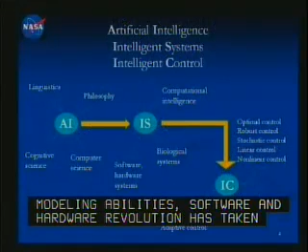Some of the ideas in intelligent systems that are new and not so much in traditional AI is looking at biological systems as inspiration, also modeling abilities. There's been a software and hardware revolution that's made implementing some of these very complex algorithms much easier. Intelligent control does have traditional control features such as robust control and optimal control, but also has brought in new ideas in predictive, adaptive, real-time optimal, and learning and planning down to an implementable level in hardware and in real systems.

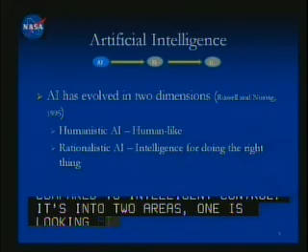AI, like I said, is quite old compared to intelligent control. It's evolved into two areas. One is humanistic AI, trying to model humans and understand how humans think and behave. But the one that is closer to an engineering application is rationalistic AI, which is using what we know about intelligence to do the right thing from a machine point of view.

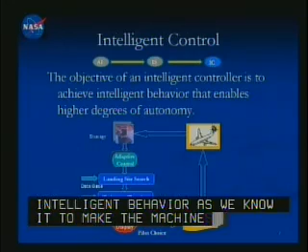So I have a little architecture here that I use to highlight what I mean by higher degrees of autonomy. This architecture is out of safety. It's a good way to illustrate higher degrees of autonomy.

We do have a pilot in the loop, and the airplane suffers some kind of damage or an upset condition. In a typical current generation airplane, the pilot will have to adapt to that condition, and sometimes the time frames can be quite small, down to almost a second type adaptation. So the pilot has to work harder, and in addition to that, he has to manage his resources. So there is quite a bit of workload on the pilot.

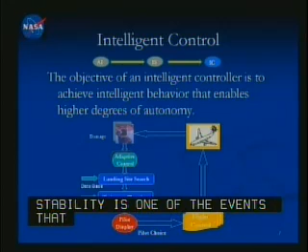Now, when intelligent control comes in, the first thing it can do is adapt to the damage and provide stability. Stability is one of the events that needs to happen down to sub-second levels, and that takes away some workload right away. So that's one degree higher autonomy. The pilot is not really directly controlling that aspect of it.

The next level of autonomy is once the airplane is stabilized, we still have to bring it down and land it safely. So there are many little pieces that need to happen. One of them is trajectory planning. Now that I have a reduced envelope after the damage, the aircraft needs to figure out what it has and come up with a plan that will safely land the aircraft. So here is another level of autonomy that's provided to the pilot, and the pilot can then opt to either use it or not use it. That's the idea of having that variable autonomy as an option to the pilot.

So intelligent control, once again, I think of it as: the objective is to achieve intelligent behavior that enables higher degrees of autonomy. This may be more relevant to aircraft as a definition, but that's the field that I work in, so it fits well.

There are other ways to quickly define intelligent control. I'll show you a couple of ways you could do it. These are the ways I've used to communicate it. If you look at controlling any system, we need two error signals. We need to get an error signal that shows you what is the difference between desired and the output of the system.

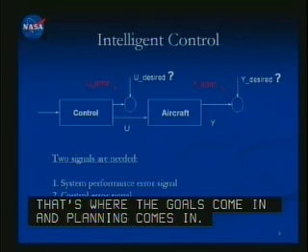So sometimes even the desired is not clear. That's where the goals come in, the planning comes in, and even intelligence can play a role. And once we know what we want to achieve, how do we get that in control? What is the error in the control activity? So that's another signal.

So intelligent control can be thought of as a way to generate these signals to achieve higher intelligence. Another way I've used to define intelligent control is using typical levels that you might have seen in many areas, where it's easier to show in a hierarchy of sophistication. So here at level 0, I think of it as robust control, which is kind of an instantaneous gain feedback controller.

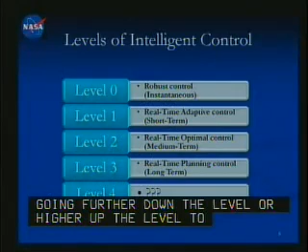At level 1, you are now adjusting the gains of the feedback to get better adaptation to the current situation. And from level 1 onwards, it's almost happening in real time, that is online, it's error correction, optimality, planning, and so on. You can keep going further down the level or higher up the level to achieve higher intelligence. We have used this hierarchy when we guide our research in intelligent flight control.

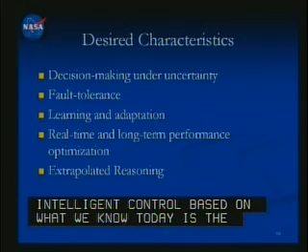Some of the desired characteristics of intelligent control based on what we know today are decision making under uncertainty, fault tolerance, learning and adaptation. The 4th bullet is a very interesting concept, playing a bigger and bigger role, which is where, towards the end of the presentation, I'll talk about brain-like intelligent control. That's where we want to go, which is real-time and long-term performance optimization.

Can I optimize as I'm flying? These are very applicable to even space travel, for example, where if you have onboard capability to sense the trajectory, then you can do long-term optimization. And finally, extrapolated reasoning.

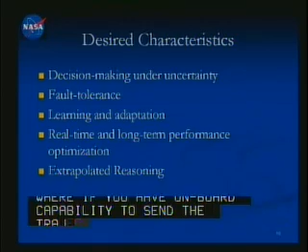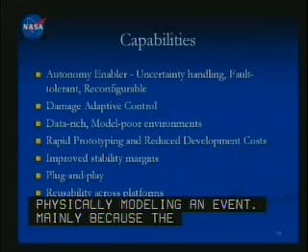So some of the capabilities we are after: autonomy enabler, I already mentioned that. Damage adaptive control. The 3rd bullet there, data rich, model poor. Clearly, you will see more and more that sensing is sometimes easier than physically modeling an event, mainly because the physics is either quite complex, or the computing power you need to model that physics may not be available for real-time applications, for example.

So sometimes it may be easy to sense and control based on what we sense, similar to what biological systems do. Intelligent control as a capability has got that aspect to it: rapid prototyping and reduced development cost. I can say from my experience, I can go from one aircraft to another, completely different classes of aircraft, and design an adaptive intelligent control in a matter of days. So that kind of quick prototyping is possible.

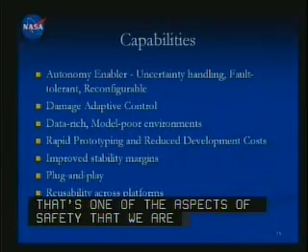Improved stability margins, that's one of the aspects of safety we are looking after, or going after. And I'll talk about plug and play and reusability. Okay, hopefully that gave a feel for what is intelligent control and what we are trying to achieve in terms of capabilities using intelligent control.

So the next few slides, I will talk about applications to aviation safety and next-gen designs. If you look at aviation safety, of course it has many requirements. Control is one piece of that solution. But in terms of control, what are we seeking? The capability we are looking for, if I have to say it in one word, is safe landing. Kind of bring it down and land it safely.

But to achieve that, we need to first understand stability, because that's the first thing that needs to happen. I should be able to recover from loss of control, in the sense understand how to maneuver the aircraft, and at the same time provide handling qualities that are consistent with what the pilot expects, so that there is no confusion while doing all of this to the pilot.

Motivation is simple. I have shown 3 pictures here, but you can get many pictures off the web of incidents and accidents that have led to the desire to help the pilot. Fortunately, in 2 of these, the pilots survived and brought down the aircraft quite well, because they had the time and the experience to do it. The third one, the tail damage one, did not survive.

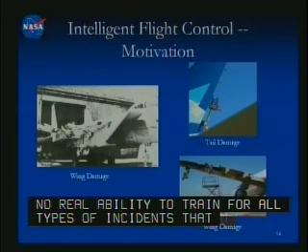The essence here is to understand that pilots who are trained can bring down most of these incidents, but there is no real ability to train for all types of incidents that might happen. The other aspect to safety is that many of these aircraft are built with redundant controllability, and we want to exploit that. So hopefully in the next few slides, I will highlight how we can exploit that.

Next slide, please. Okay, here is an example scenario. I know you cannot read that 1 through 6, but I will take you through. So there is an event, that's 1, that takes place. First thing you do is number 2, which is stabilize the vehicle. Number 3 is you perform a quick assessment of what is available. This is similar to what you may do if you get hurt, for example.

The first thing is you isolate. You don't want to use that arm because something went wrong. That's the first thing you do. That's similar to stabilizing. The second thing you do is assessment. What is wrong with it? And the third, number 4 in this, is to come up with what we call flyable trajectories.

Now this is where the concept of variable autonomy comes in, because we have a pilot in the loop. So we want to provide the pilot an option of choosing. Here I have given 2 choices, 5 and 6. Later on I'll show you actual experimental data where 5 assumes a restricted set of envelope and 6 assumes a little relaxed, a bit higher risk but more flyable trajectory. So the pilot can choose it.

Now where does intelligent control come into all of this? That's what the next few slides will talk about.

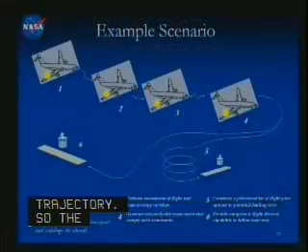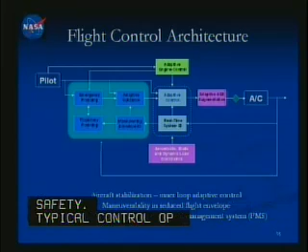Next slide, please. Here is an architecture we are going after in safety. We have several blocks in here. This is a typical control architecture. If you look in the middle, there is adaptive control, which is one of our big focuses. How do I provide extra stability? But there are also questions like, can I use the engine as an extra effector? How do I have to design or redesign the engines to provide an ability to control the moments from a stability and maneuverability point of view, beyond what is available right now?

And you see at the big block, which is all of the planning functions. I need to be able to do guidance, emergency planning, trajectory planning, and so on. The next few slides I'll concentrate on adaptive control, and also on emergency planning. So those will be my two topics. Under the Resilient Aircraft Control Project, we are looking at all aspects from this architecture.

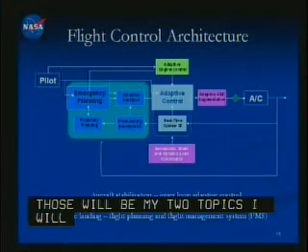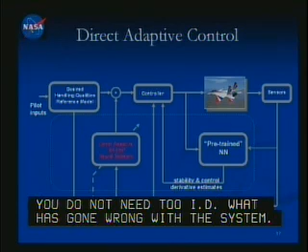The beauty of this direct adaptation is you don't need to do system identification. You don't have to spend any time identifying what has gone wrong with the system. And the benefit of that is it can accommodate many different types of incidents, not just wing damage or tail damage, but any combinations of that. So it has a pre-trained neural net, or if you want to think of it as just a function that captures known dynamics before the fault happens, before the damage happens.

So this is the current knowledge of what the system can do. And on the left, you see desired handling qualities. So the pilot, when he interfaces with the airplane through the stick, is actually asking for desired roll rate, pitch rate, yaw rate, and through an expectation model, what we call the handling qualities model, what kind of a short period or Dutch roll he expects. Typically there is a controller that takes that input, shapes it into control surface deflections that go to the airplane. And on the right, you see the sensing taking place.

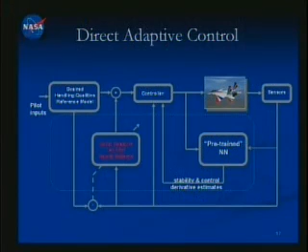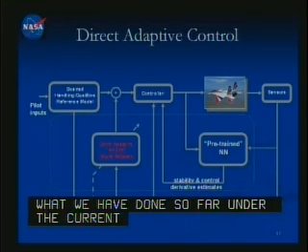Now at the bottom, we had those two components, the fixed neural net and an adapting neural net. Neural networks were used because they have their own nice features. I don't have time to go through that, but you can also use any parameterized function instead of neural networks. Now, what we have done so far under the current safety project and previous projects is we have researched this architecture quite a bit. Some of the results I'll show you today include flight test results that were done at NASA Dryden, and some of the simulation work that was done at NASA Ames and Langley.

Now, let's move on to the next slide, please.

If you look at the flight test results done so far, it uses an F-15 currently available at NASA Dryden. The nice thing about using an F-15 is you might think it's not very relevant to transport aircraft, but the beauty of it is you can take it to the edge, knowing it's got the performance to come back. So you can experiment with a high performance aircraft, all the features you're looking for, much more safely, since we have a pilot in the loop, than you could with an actual transport aircraft.

The modified F-15 available at Dryden has two canard surfaces, those two surfaces in the front. Those are scheduled as a function of angle of attack, so we can actually modify that scheduling to create instability in the system. So that's what we did. We took the multiplier that multiplies with angle of attack to the canard surface and messed with it, changed it to make it unstable.

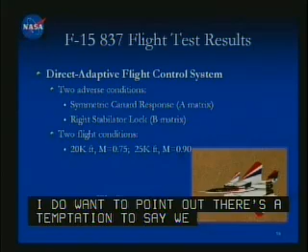I do want to point out there's a temptation to say we could do a lot of this experimentation with unmanned systems, and that's true, we can do a lot of it. But when there is a pilot in the loop, it completely changes everything, because now we are talking about two systems adapting, the pilot and the software. That interaction is poorly understood, and through experimentation we figured out that even we don't fully understand it. Pilot-induced oscillation is one of those events that's not desired, and that's the thing we want to avoid when we have both the computer and the pilot adapting.

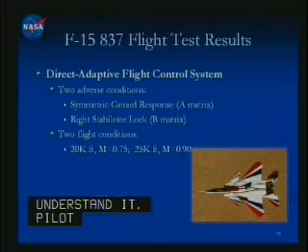So with that, let's move on to the video, please, and I'll keep quiet through the video.

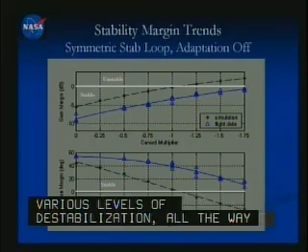The blue line is the flight data. So we flew several flights at various levels of destabilization, all the way up to neutral stability, which is shown on the right at minus 1.75 Canard multiplier. And the blue symbols on the line are the actual flight test data.

Then on the top there is a black dashed line. Those are the simulation data. Whenever we do our experiment, we first do it in our offices, then in a small engineering simulator, then in a full engineering simulator, and finally in the actual aircraft. So the black line is a full engineering simulation where there is a pilot in the loop, and you can see the simulation does not capture all of the non-linearities that you get out of a flight test. So right there is one selling point for flight testing ideas, because you don't really capture all of the non-linearities that you want to really simulate.

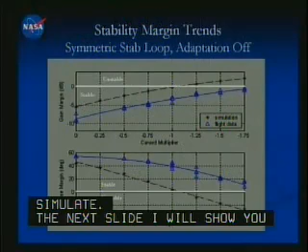Now, in the next slide, I will show you the concept I've been discussing about consistent handling qualities or consistent performance. You will see how, when we have neural net adaptation on—by the way, this is without neural net adaptation—so when I turn the neural net back on, both simulation and flight tests will look very similar. Can we go to the next slide, please?

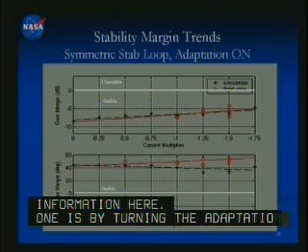So here there are two pieces of information. One is that by turning the adaptation on, simulation and flight tests behave the same. And the reason for that is the adaptation. It's adapting, making the simulator behave like the real airplane by adapting the handling qualities model, because the neural net is able to absorb all the non-linearities.

And the other thing I want to point out here is you can see the best place to see it is at the rightmost point. We have gotten back the 6 dB. Before, in the previous slide, we had 0 dB at the extreme right. Now I have 6 dB. So by turning the adaptation on, I got back the stability that I was hoping for. This is a big selling point for adaptation—you can gain back the stability that you lose by having a damaged situation.

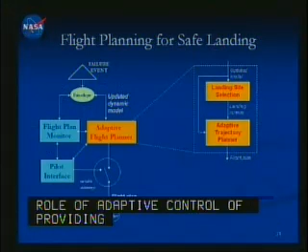Can you go to the next slide, please? Okay, so far we've talked about the role of adaptive control in providing increased stability. But like I said, stability alone doesn't do it. You have to safely land the airplane, which means I should be able to identify what I have and come up with a plan to bring the airplane down. Towards this, we have been working on some other technology highlighted in red, the adaptive flight planner, for example.

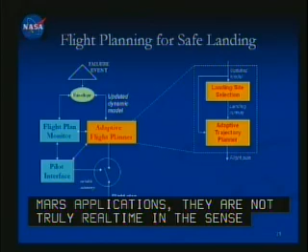It's adaptive in the sense that it constantly and consistently gets envelope constraints fed into it, and it does real-time planning. Typical planning software, for example the ones used for Mars applications, are not truly real-time in the sense that there are humans on Earth who change the plan based on feedback. But here it's done on the fly—it gets input from the software and changes the plan. The other nice thing about this approach is you can come up with what-if scenarios. So let's go to the next slide, please.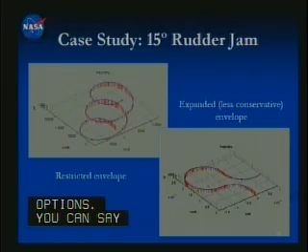And once you are stable, now you have time to react to these options. You can say the right one is, although maybe higher risk, I think I can do it based on what I know. So these are the trade-offs that you can do in real time, provided to the pilot to safely land the vehicle. Next slide, please.

Okay, so here is another very interesting example we looked at. And this is where I'm trying to take things to the higher levels of intelligence, per se.

I have here a C-17 airplane, which most of us know is a high performance vehicle. It's such a beautiful vehicle from a control point of view. It's got so many surfaces to play with. You can actually, it's got like 22 control surfaces. So it's like a controller's dream right there. But they are not all used for safety.

They are used only for performance, to get the high lift, high drag, tactical descent, for example. So what we said was, let's try to see for a damage scenario how we can use these surfaces. Can you go to the next slide, please?

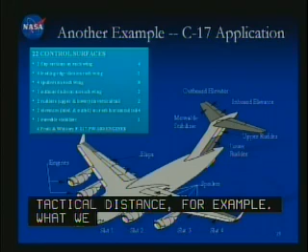Optimal control allocation basically looks at a performance index and tries to come up with the right set of control surfaces to actuate to give you that performance. In our case, it was simply minimum error, but you could also say minimum drag or minimum noise, whatever you want to choose as your performance. The nice thing is it does that in real time.

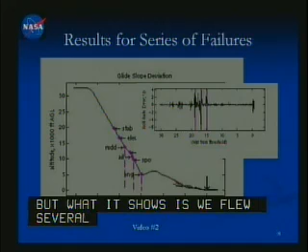This shows one of them, and you can see where the aircraft is making a rapid descent. So on the left axis you have the altitude, and on the x-axis you have time to touchdown, distance to touchdown.

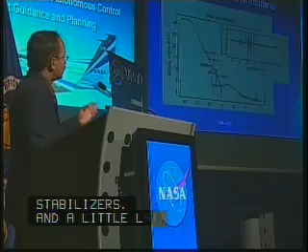So at about 20,000 feet, the stabilator fails, one of the stabilators. And a little later, the elevator fails. And a little later, the rudder fails. A little later, the aileron fails, and so on, all the way down to one engine failing. So this is all happening on one side of the airplane, the assumption being some kind of a hydraulic leak has taken place and a series of failures.

Now, what was beautiful was, I don't have a video that captures this, but the pilot really didn't feel a thing because it's highly controllable. So the intelligent flight control figured out the right settings to give him to keep the stability going, and he could land it all the way down.

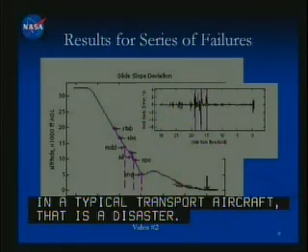I do have a video that I'll run in a minute that showcases only one thing. It shows a tail failure. By that I mean all the control surfaces in the tail fail. In a typical transport aircraft, that is a disaster. You can no longer have pitch control or yaw control. But here, you'll see that at least from the little video I have, basically nothing changes. The tail fails and you can still fly the airplane. That was the beauty of the C-17.

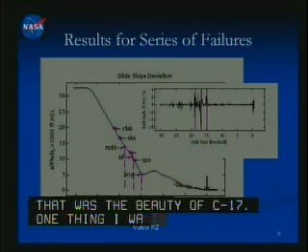Now, one other thing I want to add here is that when we did all of this, we realized very quickly that we did not fully understand the structural constraints. When we move secondary control surfaces, we don't know what the effect of the aeroelastic behavior will be. So that's one other research area of study that we are pursuing under resilient aircraft control.

Can we roll the video, please?

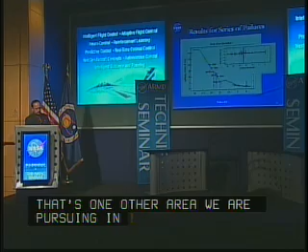Okay, here we go. So it's a C-17 simulated. It's got its own stability augmentation system engaged under adaptive control, and you have a tail failure, and it pretty much still flies. If there is a tail failure at this point, it will dive to the ocean without adaptation because you have no other surfaces to control.

So this is just a small video. I have lots of other videos, but we thought this would be the best one to show for the time we have. I think it will stop pretty soon. We had about 3 to 4 pilots come and fly the C-17.

If you recognize it, that's the San Francisco airport being simulated.

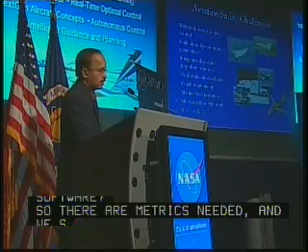I know stability is a good metric, but for adaptive control, do the traditional metrics like transient, steady state, rise time, settle time, and so on, are those sufficient? Do we really understand while adaptation is happening what happens to the actual software? So there are some metrics needed, and we should be able to show that if you define a metric, I can consistently, 100% of the time, do the same thing for repeatability. So that's where the stability and performance guarantees come in.

We also have challenges in integrated flight and propulsion control. How do I design the next generation engines that will give you the ability to control yaw, pitch, and roll?

Verification and validation is a big problem. Verification, especially, since the software is quite complex. How do we do that?

The last three bullets are more towards how do we flight test this. I have manned, I can use manned systems versus unmanned. Unmanned is cheaper, but we don't learn the whole story. We need manned systems, and they're expensive. Subscale versus full scale—so there are challenges there.

Right now at NASA Langley, we are looking at subscale models that have been balanced. They have the inertia balance, so we can learn a bit more than cheap off-the-shelf subscale models. And finally, can we use next-gen designs like the blended wing body to look at safety issues? Or is that too much to ask for, since they are only conceptual designs? Should we wait for them to be more solid designs before we try it? So there are many challenges when it comes to validation.

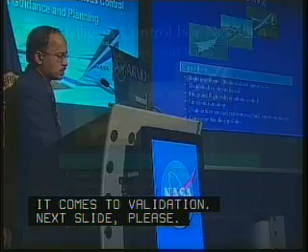Next slide, please. Okay, in the next few minutes, I will talk about how intelligent control can play a big role in next-gen designs. We will look at three ideas. The capabilities we are after are listed here: rapid prototyping, data-based versus physics-based, integrated flight and propulsion control, increased autonomy for certain applications, and an enabler for increased performance.

A colleague of mine kept saying it's like the BASF commercials—like the way they say, we don't do anything, but we do everything better. So you give an airplane, we'll make it fly better. You give an airplane, we make it safer. So intelligent flight control doesn't really directly feed into the design itself. It could, but most of our challenges are, once an airplane is given, how do you make it better, more efficient, more safe? And finally, consistent handling qualities.

Next slide, please. Okay, so I'll talk about three applications. One is intelligent engine control. The other one is cruise efficient short takeoff and landing. And the last one is payload-directed flight.

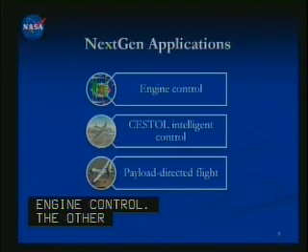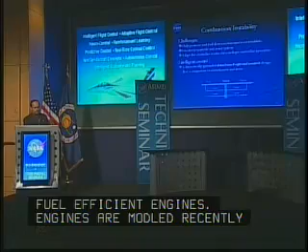Next, please. Okay, here is a challenge that we looked at, which I think is very applicable to next gen as we talk about fuel-efficient engines. Engines are modeled reasonably well, but there are some phenomena that are not modeled because the physics is so complex. And one of them is combustion.

Combustion is an inherently unstable system, with pressure fluctuations and noise. So if you try to run the combustion lean, this instability will blow the flame off, and that's not good. So to keep the flame going, they run it rich, and that is not fuel efficient. So if I can provide stability via control, then I can run it leaner and get better fuel efficiency.

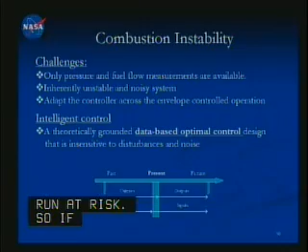But to do that, we don't have good models of the combustor itself. So how do you actually go about coming up with a control algorithm that will work well for such a situation? This is where another intelligent control approach comes in, called predictive control.

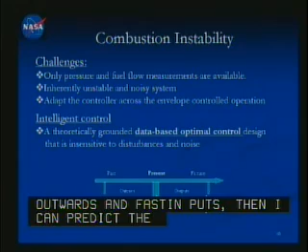At the bottom, you see a set of arrows. What it's trying to tell you is that if you give me a collection of past outputs, the present output, and past inputs, then I can predict the future up to some horizon. So theoretically, given how much you give me in the past, I can predict so much in the future. Once I can predict, I can use that to control the engine for the future. This is called predictive optimal control.

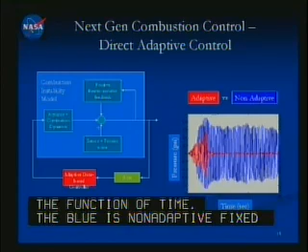On the right, for example, you see the pressure fluctuation as a function of time. The blue is a non-adaptive fixed controller because you don't have a good model. But the red one takes a little bit of time until the data is accumulated, then it adapts and completely stabilizes the pressure fluctuations. So that's a good example of how you could use data versus models in areas where it is difficult to come up with models.

The next application is something being pursued right now under the subsonic fixed wing project. The cruise efficient short takeoff and landing is a conceptual vehicle. It's got many options in terms of how you generate the extra lift using the engine, blowing air from the engine. All of this physics is being studied in wind tunnels and so on—it's quite an intensive effort to understand the designs from the physics point of view.

So one aspect we thought of was, can I do this without a good physics model? Going back to the same data versus physics question: if I can sense what the airplane is doing, can I use that to control it with limited physics-based models?

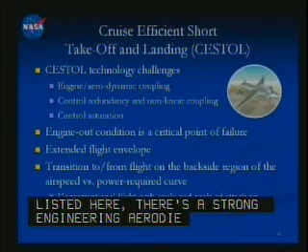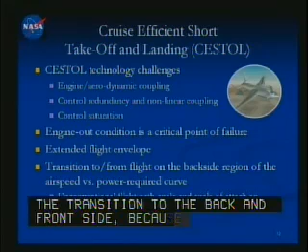Some of the control challenges are listed here. There's a strong engine-aerodynamic coupling in CESTOL vehicles. There's plenty of control redundancy, not all for safety or performance—some are simply used to provide extra lift, but can we use that for control? There's also the transition to and from the backside of the power curve to the front side, because these cruise efficient short takeoff vehicles are meant for smaller runways, meaning you have to fly slower as you come down to approach. How do you achieve that while providing safety and performance?

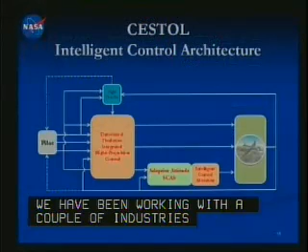So very quickly, this is the architecture we are looking at. Everything you see in red is what we consider intelligent flight control. We have an adaptive inner loop, an intelligent control allocator, and that big chunk called the data-based predictive control, where all of our predictive algorithms go to predict flight behavior since we don't have good models for the aircraft. We've been working with a couple of industries looking at future next-generation designs and how we can simulate and test these ideas.

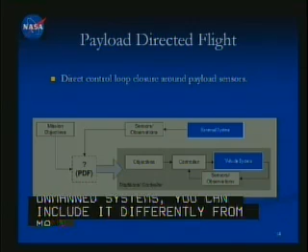This is one application for unmanned systems. Like I said earlier, intelligent control for unmanned systems can be thought of very differently from manned systems—suddenly you can open it up and think of new ideas. The whole concept can be better explained in the next slide, but before we move on, the dashed line there is the payload-directed flight block. That's the research—how do we come up with that?

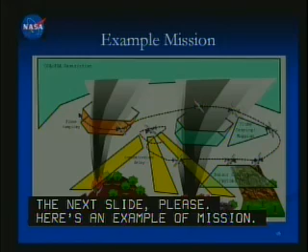Here's an example mission. Being from California, fighting forest fires is one big challenge we have. Right now, manned aircraft help, and also unmanned aircraft for surveillance to map out that region. But the question is, can this be done with real-time planning and control? That is, can I use an unmanned system with an onboard sensor that detects fires, actually goes to those regions and maps it out, and maybe eventually even helps with putting out the fire itself?

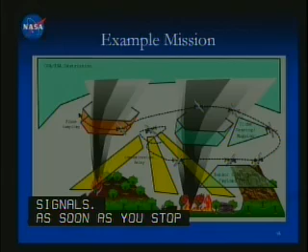So how do we achieve this kind of intelligence on board? Typical autopilot systems will have altitude hold, speed hold, climb, or descent. But in this application, it may be combinations of them. It may be something where the sensor says, give me a flight profile that will keep constant infrared signal or constant thermal signature. As soon as you start speaking sensor language, the interface from the sensor to the actual control on the unmanned aircraft gets complicated. So how do you make that simpler?

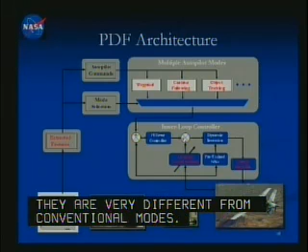We are looking at some intelligent flight control concepts. On top, you see multiple autopilot modes, very different from conventional modes. Instead of altitude hold, we say waypoint hold, you just follow the waypoints. Or contour hold, where you say I want an image contour and hold that image contour. Or thermal signature hold. So how do you take that kind of command from the sensor and translate it into control?

To be beneficial, it also needs planning and feature extraction as one of the key components of intelligent control.

There are many applications of payload-directed flight, which we all know. Some new ideas for airspace applications include formation flight, which is shown to reduce drag. So how do you achieve formation flight, keeping two airplanes positioned purely based on sensor feedback? And also futuristic unmanned cargo aircraft, how do you keep them in low-noise, non-interfering trajectories?

So with that, hopefully I gave a flavor of the research being done at NASA in aviation safety and NextGen. What I want to do in the next 10 minutes is talk about some future ideas. These aren't directly funded by anyone, but they're concepts we as researchers always look for to pursue.

I'll highlight three ideas. One is called the polymorphic control system. The second is brain-like intelligent control, and finally, intelligent plug-and-play control.

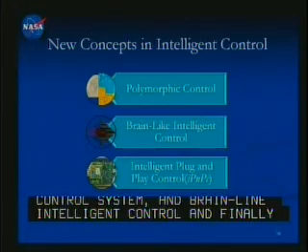So what is the polymorphic control system?

As we started working with intelligent control, we soon realized there is potential for helping multiple unmanned systems. For example, let's say I have a couple of UAVs flying, and there's a bunch of unmanned ground vehicles coordinating a task with the UAVs. How can I share resources across wireless networks? I may be able to use a sensor from a ground vehicle for control on the aerial vehicle. So we built a mathematical architecture using topological formulations for sharing data across physical boundaries.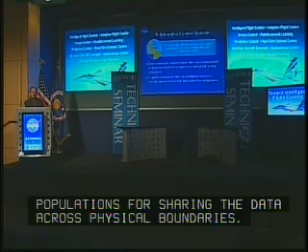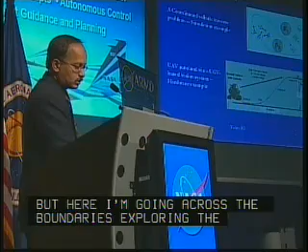All the applications I showed were within the physical boundary—I have an airplane, one actuator fails, I use the other actuator. But here I'm going across boundaries, exploring wireless networks and networking capabilities we have. We've looked at two applications. I'll talk about the second one because I have a short video of that.

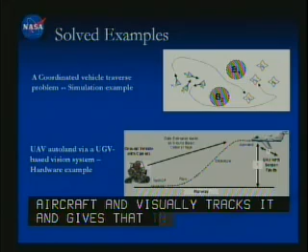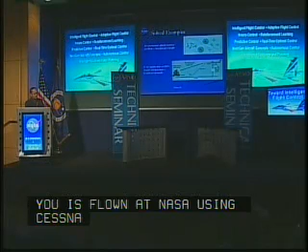Here is an example of an unmanned aircraft signaling a complete INS failure, the inertial navigation system failure. Then a ground vehicle moves into position, identifies the aircraft, visually tracks it, and gives that information back to help guide it down to landing. So all the onboard sensors have failed, and the sensing comes from an unmanned vehicle stationary on the ground. The video I'll show was flown at NASA Ames using a Cessna scale model under rover control, and as the aircraft comes down to land, it's totally unpiloted.

It's autonomous, and towards the end you'll see the rover's position as it watches the aerial vehicle. So here is another example of where intelligent control can play a role across physical boundaries. Can we roll the tape, please?

Okay, so that's the UAV. It now signals to the rover that something has gone wrong - it's got a failure. From now on, the rover actually guides it all the way down to flare and touchdown. One of the uniqueness of this is it actually flares, as you saw there. Typical autonomous flight down to earth doesn't flare - they just come, it's almost a crash landing. So hopefully you got to see the rover as it went by - it's a little rover that was sitting on the side.

Okay, so we have done interesting experiments. Again, these are kind of unfunded, so not real good videos here to show you. Can we move to the next slide, please?

Okay, so this I think is the exciting future of intelligent control. If you look at the brain statistics, just the numbers of what we have, 10 to the power 13 neurons - that's 10 trillion neurons. And if you assume these connections are storage, part of the storage, we have something like 10 to the power 15 bits of data that we store.

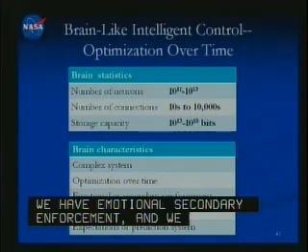Another thing we know about brain characteristics is it's a complex system that works. We know that we do optimization over time - we are always planning ahead. We have emotional or secondary reinforcement, and we have an action-corresponding control component. We also have an expectation system. So the question is, how do you take these concepts and try to build a machine that can move towards brain-like intelligent control?

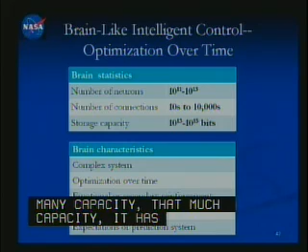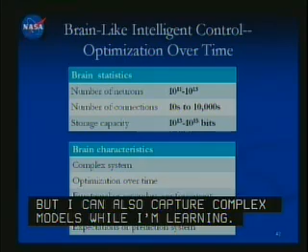One thing we are going to see right away is that if I'm going to have that much capacity, it has to be modular. So neural networks is one way to do it - I repeat the neurons. I can test one neuron and then say I have billions of neurons working the same way, so verification becomes easier. But I can also capture complex models while I'm learning, so there's no way I can sit and program a 1 trillion memory in hardware - I have to do online learning. So I have neural networks and online learning, and I have the ability to capture the optimization over time, the predictability, and the secondary reinforcement. Can you move to the next slide, please?

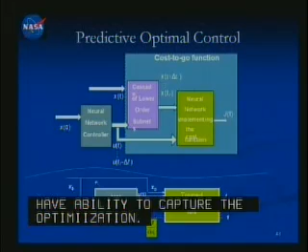So here is an architecture in a very simplistic way. Buried under that is a bunch of equations and neural networks, and these have not been proven to do much else so far. People are researching that, and we are looking into that too.

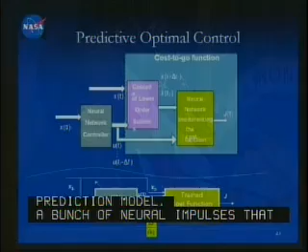So what it has is a 3-component box here. The one on the right in green is a bunch of neural networks that capture the performance over time. The blue one is the prediction model - a bunch of neural networks that sits and predicts, models the future times. And then we have a controller. At the bottom, I've shown you, in a cartoonish way, how you can adapt the controller online by using some ideas from optimal control. Can you go to the next slide, please?

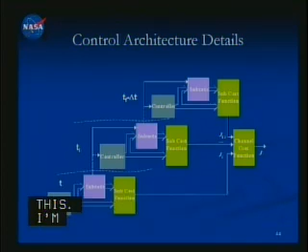So here is something - if you actually open it up, it may look somewhat like this - that I'm using systems from T-F minus delta-T to predict T-I and down to the current time T and future times. So this can very quickly unravel into something complicated. So what we are looking at, in a very minimal way, is how do we come up with, in the simplistic way, maybe a 3-neuron architecture that can do control, prediction, and reinforcement, and then multiply it several million times to get the power of brain-like intelligent control.

Some of the applications that we have talked about in the past, for example, low thrust trajectories. If I can have spacecraft self-locate itself, instead of using the deep space network, then I can come up with trajectories that are self-correcting. And since we are talking about now months of travel, you need to have brain-like intelligent control for long-term optimization and control. So how do we achieve that? Through intelligence or intelligent control.

Next slide, please. So the final idea that we have pursued, and I think it's got potential use going into the future - one of the aspects of any complex software is verification. Verification cost is skyrocketing because every line of software adds to verification cost. So there is a desire to do some of this in hardware. So when we say hardware, can I come up with a verified hardware that I can use on any system? That was the question. Can I take a control hardware that works on an airplane and put it on a rover? Will it work? So we took this concept and actually applied it to different systems. Let me show you that next.

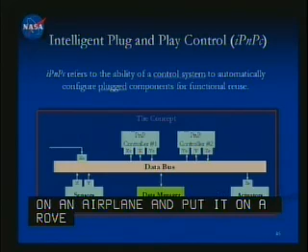Can you go to the next slide, please? So here is conceptually what we can have. On the right side is a platform, on the left side is a hardware. They do a handshake and pick the right control block to run the controller. Can you go to the next slide, please?

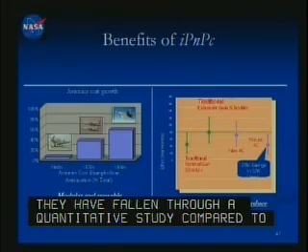This highlights the benefits of going plug-and-play control. We did a study with SRS Technologies, now called Mantech Systems, looking at adaptive control and how much cost savings there could be. They found that compared with traditional gain scheduling, you can save 23% of the cost right there for avionics software. So our push is that if you go down to repeatable, reconfigurable hardware, we could save a lot more money, mainly from software development, but also in verification costs.

I'll show you very quickly four applications, and the only thing I'm trying to motivate here is that the architecture really doesn't change much when I go from an aircraft to an unmanned aircraft to a ground vehicle to a space application. So it is there, we have the tools there, we just have to make it happen.

Okay, so here concentrate on the IPNPC block. It looks the same from this slide to the next slide to the next. And these are all examples that we actually did, not just conceptual architectures, but we actually have used this. Here is one for an unmanned application - we were looking at a Mars application at that time. We can use the same architecture for the inner loop; the outer box has changed, so the majority of that stays the same.

And we used that for rover control. We showed steering control, you can do that. And we did that for docking as well. So we showed four very different classes of applications and showed that you can have plug-and-play capability in the areas that we have looked at.

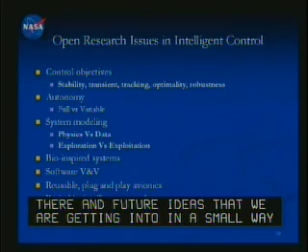I listed them here. Some are obvious, for example control objectives - we have to worry about stability. How do you quantify stability, transient performance, and so on? What do you mean by autonomy, from full autonomy to variable autonomy? What role do they play?

There have been lots of talk about bio-inspired systems. Bio-inspired systems are good in many ways, but they bring their own challenges. Sometimes I feel they may be a little distraction - just because it works well in biology doesn't mean it's going to be the right solution for us. So that's a challenge when people come up with new ideas that are bio-inspired.

I think software V&V is a big puzzle. That may be one of the things we might have difficulty overcoming unless we spend a lot of research dollars. I know it's a big topic, top of the agenda for the National Science Foundation and many other research labs. And finally, brain-like intelligent control is an open research issue, lots to be done there, and I think a lot of benefits will come out of that.